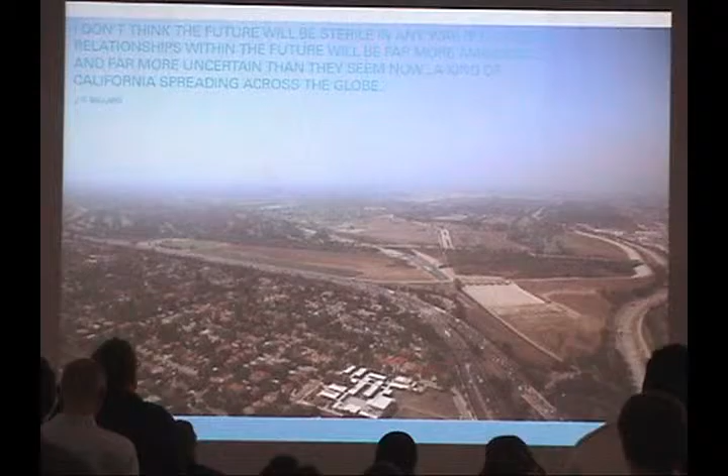This was an image I took last May. I've been up in a helicopter a few times over Los Angeles with a photographer friend of mine, looking at the space in between being on the ground and in between Google Earth. Even this sort of 2,000-foot horizon line series of images has been incredibly interesting for me to look at the relationship between deep space, horizontality, and objectivity.

A kind of graphic project vis-a-vis land use has a lot of influence on the way we think about work. So the first part of the lecture is a bit straightforward.

We'll talk about the Highline project, which is currently our biggest project in construction. To a certain extent, it's a project which probably does summarize a lot of what the lecture might be about. But I also want to go deeper into it in terms of a kind of building process.

New York, we understand, is obviously a kind of city based on the idea that unconsciously Manhattan, among all the boroughs, is essentially the identity device of New York. But identity at one level has shifted over the last 5 or 7 years through Manhattan's growing autonomy as a site for real estate speculation.

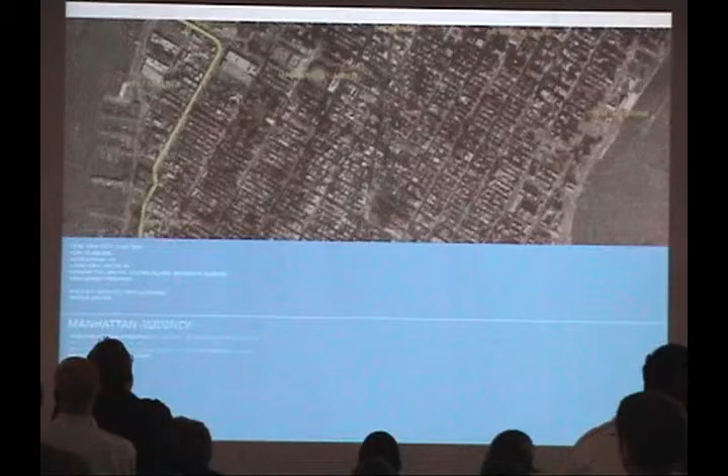Architecture and architects have been given opportunities to contribute to that kind of isolated market. There are 50 or 60 projects by well-known offices who've gotten chances to do their first projects in New York, and in some cases North America, beginning with probably Richard Meier, who practiced in New York for 30-something years and got to do his first building in his own city.

This issue of real estate saving Manhattan challenges the issue of new identities for the city. It's been an interesting thing to figure out how to speculate on all aspects of architecture where you don't have control over a lot of the issues—in this case, condominium housing and condominium planning, which might not seem to be the most provocative kind of material to work with.

So essentially what one is left with, in my estimation, is how to make a private building and convert it into a public project.

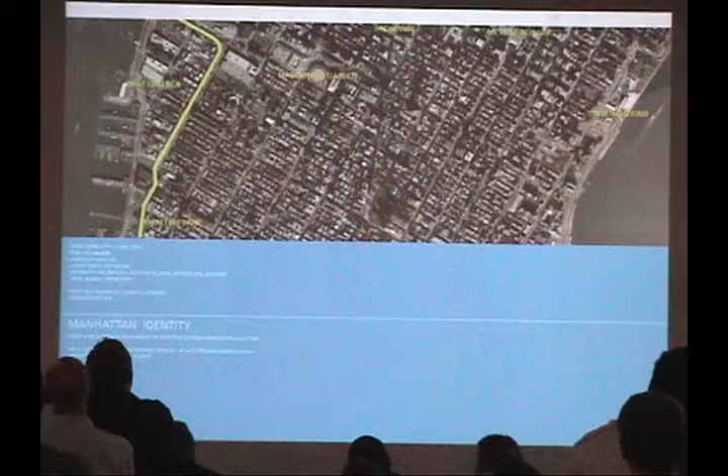The High Line we know pretty well, being developed and constructed now in Chelsea on the west side, and here are your other monuments. 23rd Street is a pretty interesting street, a major thoroughfare east and west, and we're just to the west of 10th Avenue, as the High Line is about 100 yards also to the west. London Terrace is right here—one of the biggest mega buildings in Manhattan, a big giant brick apartment building.

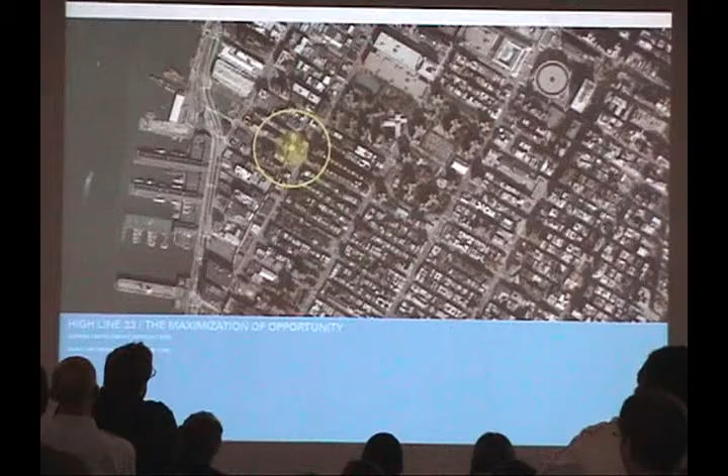Down here is more of the types of influences that I would like to bring to a project. That's the Chelsea Hotel, where Sid Vicious and Bob Dylan and William Burroughs all hung out and plied their trades.

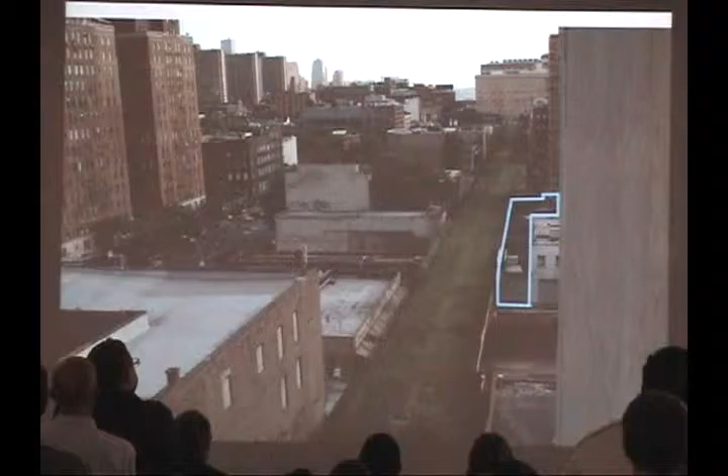So the site that you see here, it's a block-through site. We're looking south down the High Line. These images are from March 2005 when we began the project. It's now 3 years in the making, more the normal kind of time frame to do architecture, more or less a 4 to 5 year project. London Terrace is here, 10th Avenue is here, and I think construction is coming up to 20th Street on the High Line in the next half year.

Looking to the north, it's important to understand this site and this project, and I'll try to fold in the issues in the preamble to the lecture. If, on the one hand, architecture becomes sort of authentic, if it's connected to a site, in that a building can't be exported to any other site because the site drives it to a form of particularity, to a form of autonomy.

My experiences in Japan actually have led me to believe that this is a site which I've seen before, even though it's actually a very singular site along the High Line. Therefore, all projects to me have a threat to move someplace else, and that's maybe the first taboo to offer. Can projects really have so much weight, so much gravity, so much specificity that there would be no possible claiming that they could migrate? So I want to put that in your ear as you see this project being, let's say, literally excavated out of this site.

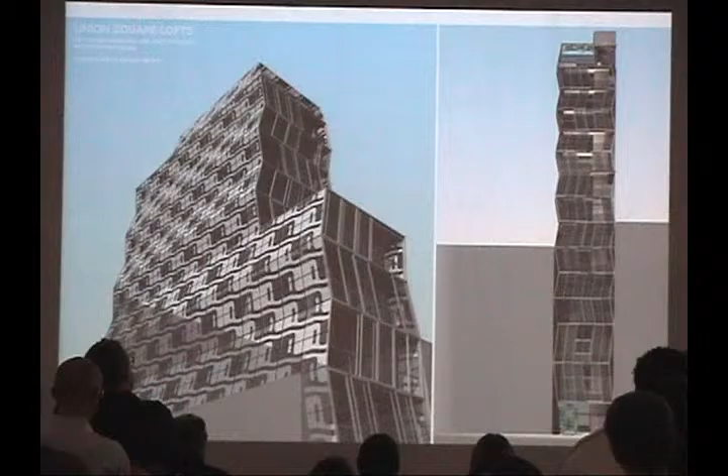In this case, it was our first project in sort of the harder core real estate market, where we essentially know that we have to have a straightforward scissor stair core, and we have a plate of space left to make this kind of loft. Our project was pushed to the perimeter, and it becomes an absolutely unabashed envelope project. It was a bit of a shock to get the commission, and to be thrust into the world of experimentation within 50 centimeters, because organizationally the project was determined.

Now I'll show you 7 images of 7 drawings which describe the 7 exceptions to the zoning that this building, let's say, demanded or asked for.

Because on this site, and I'll put you in the context, there's the High Line. In this case, we're looking to the north. The blue part is the as-of-right volume that could be constructed on the site, a 25-foot wide building. Of course, our client was well aware of that, and he asked us if we could make a building bigger, for 2 reasons. One, he wanted a more profitable project. Number 2, he had a sense, even though he was a rookie in development, that this particular site would demand a building that didn't conform, because the conforming volume somehow to him wouldn't be interesting enough at this 23rd Street juncture.

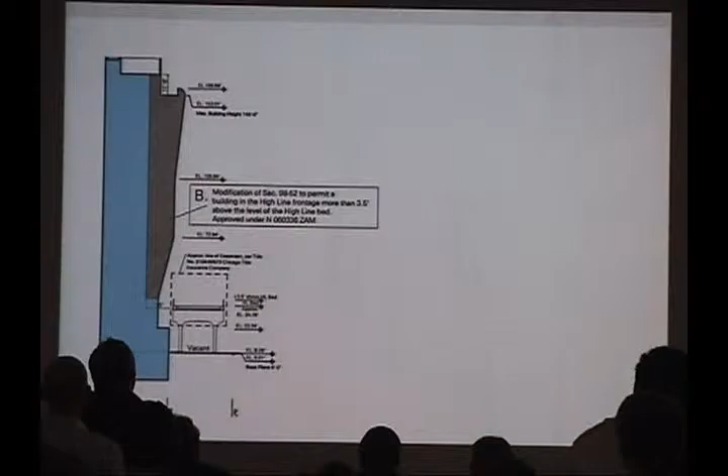So that's the main intrusion into the setbacks. 15 feet from the High Line was the conventional easement, leaving 25 feet of a 40-foot wide site, with 5 feet into public space. I think it's one of the only, if not the only, places in New York where there's actually inhabitable volume in public space that's not like a cornice or a piece of decoration.

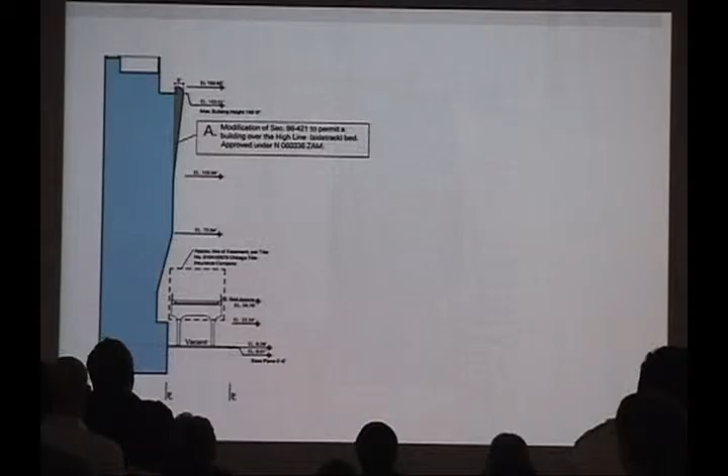And this profile, which is just a profile to help the floor plates continue to get bigger as they go on the top, I'll show you why that was needed. It's also the description of where, in terms of the graphic and the idea of the profile, we were working with the idea that this essentially held the code to whether or not we were going to be able to make this project work for city planning, because in many ways this was our discretion: how wide, how far, how quick can we in fact expand the width of the building and have it still seem as though the project is in a perfect hand-in-glove emergent fit with the site.

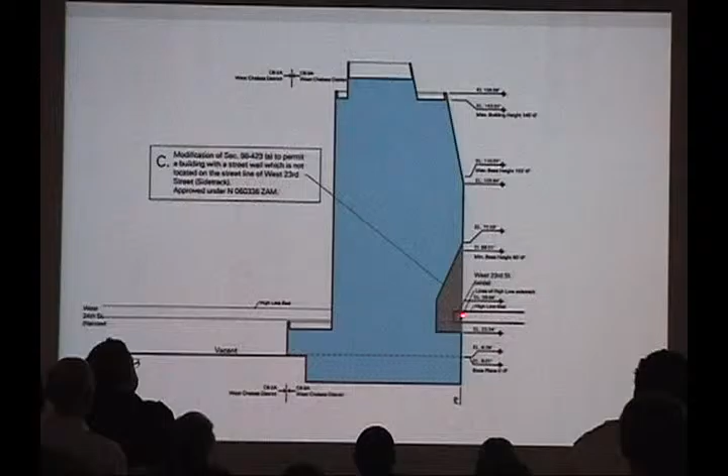The issues that also forced the project away from other developers was the fact that the High Line actually entered the buildable volume of the site by 5 feet. So this kind of Aikido method of simply having the building avoid this intrusion produces this kind of geometry, and it also produces a situation in plan which had to be worked around as a bit of a problem. But this is an interesting moment where zoning forces you to build a complete street wall, but the site condition won't allow you to. So we inherit that as a kind of form finder.

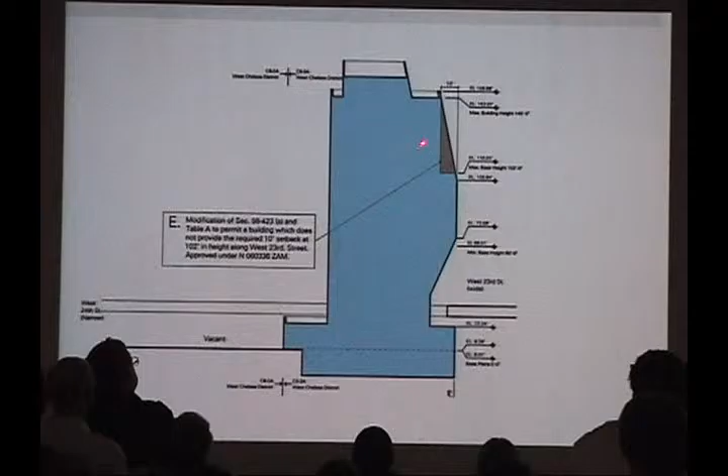In this case, the sky plane, we just asked city planning if we could build out along the plane of the envelope rather than the traditional wedding cake step back. 5 feet was asked for also in the rear because of internal planning, and a 14th floor to make a 2-story penthouse was also asked for.

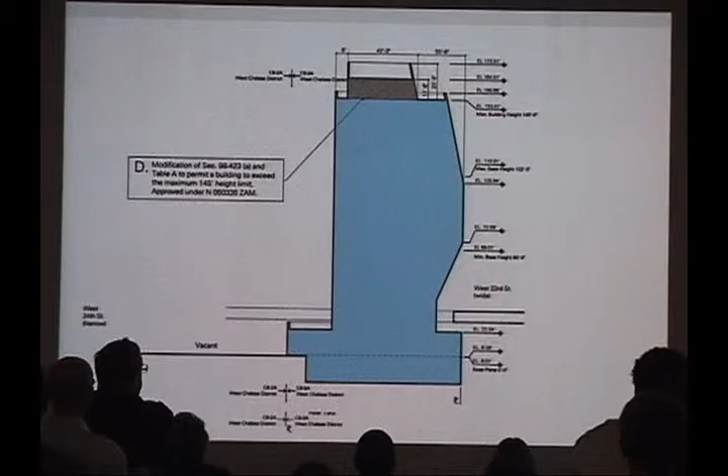So it's much taller, much wider, much deeper than the building zoning would allow. With that, the project emerged as a moment where surely city planning would not want to continue supporting projects that were that aggressive in tweaking the zoning. But because we have a unique site, with 3 facades - south, east and north - we have not only a corner condition in a mid-block, we actually have almost an end block condition, as if the building was stretching between 2 streets, a site giving us 3 facades. So the uniqueness of it as a found condition allowed us to insert a building which wouldn't cast shadows or create negative conditions around the site, the kinds of things that would have shot the project down.

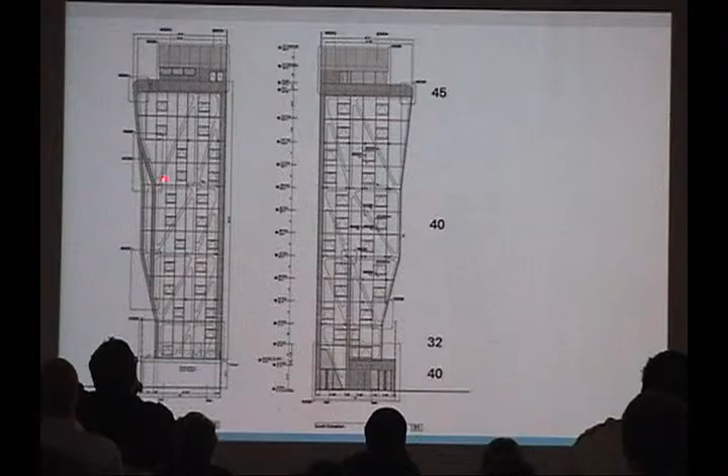So on the front facades, the building is essentially split into two very self-similar profiles. This one on the south facade, you can see the 40-foot wide footprint, 32, and out to 45, and the modulation between that exterior surface in the front and back, allowing north-facing slots of glass. In this sense, the project is both found or excavated on one hand, partly produced from the demand of the client, and at the same time also invented or propagated from our own interests.

In that sense, this project is probably no different than any other project we would work on, except I wouldn't go so far as to say this project would ever happen again anywhere else. I'm not claiming the project is responsive, but the formal language we work with is a responsive formal language. It's actually a highly economical formal language, and it's a way in which issues of opaque versus transparent surfaces - in this case, a transparent surface demanded by the client for south-facing views - makes a lot of sense.

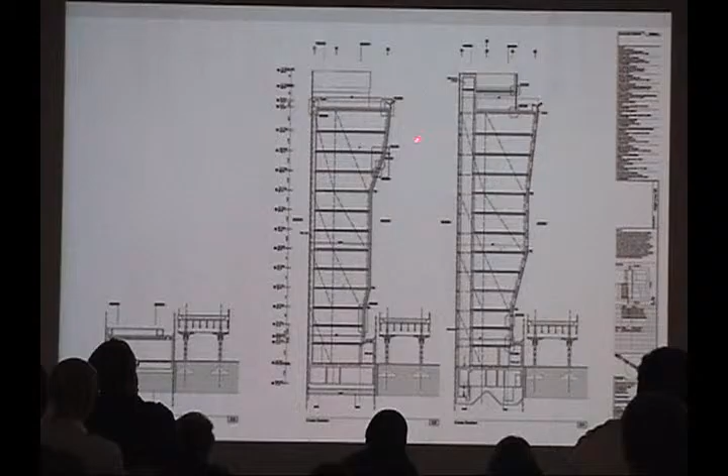But also for the ways in which the project, in terms of a surface relentless in its own ambition to articulate this half of the building, the profiles are completely based on the demand and agenda for the idea that the form of the building is sloping back at the bottom and sloping out at the top, as a way to constantly create the most amount of square footage higher up in the air.

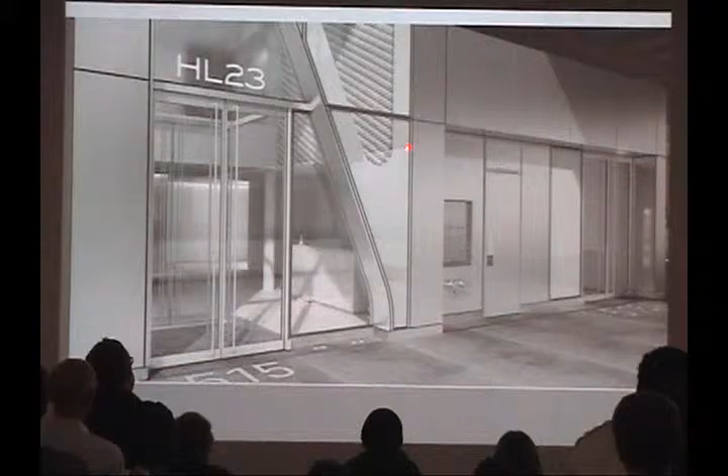Here's a view of the lobby. It's anodized aluminum. This is the gallery next door - a very small Japanese scale lobby, 2 stories back to a single elevator. You can see the laminated glass units coming down, and the relationship of the graphic project and the frit on the exterior that essentially mirrors the structure on the interior.

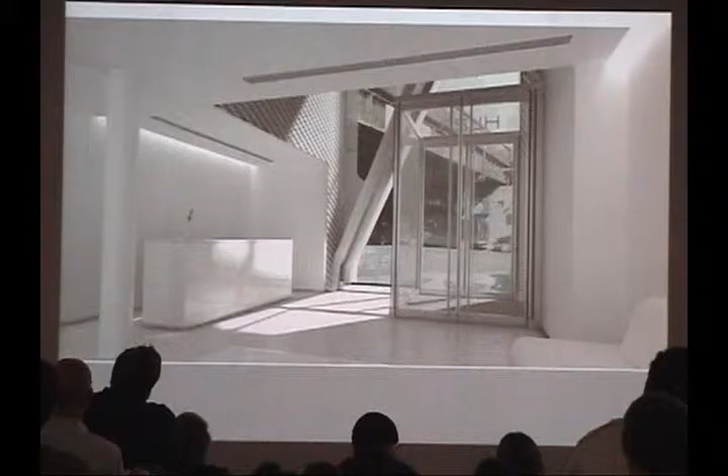Here's where we get into methods that aren't new, but are particular to us, and ring true in this case—becoming a kind of symbolic project: the thin, the 2D, literally meeting, sort of centimeters away, the robust modernist, force-taking expression of robust structure.

When you read the project, we want the frit to be the first thing you read, as a kind of immediate afterburner. So the first thing we're interested in is reading the 2D proposition of the facade. The building is robust and constantly changing, never completely flattened in any one plane, yet I believe in the power of these devices because here they're doing nothing more than reiterating the structure.

The question would be, why bother? Why spend that much time talking about something when the tectonics of the project would be completely readable behind the glass, in terms of an offset series of diagonals and verticals? Let's just say it comes after a lot of thought and analysis about contemporary life, contemporary culture, and the idea of the resonant nature of the 2D.

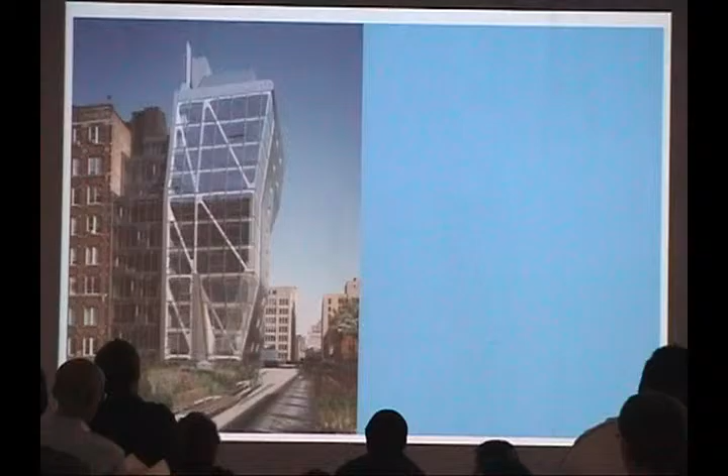It's become something I believe architecture can readily absorb and engage with. It's a little hard to articulate because to a certain extent we're talking about issues of visual perception, for which psychology, history, and one's experiences become part of it.

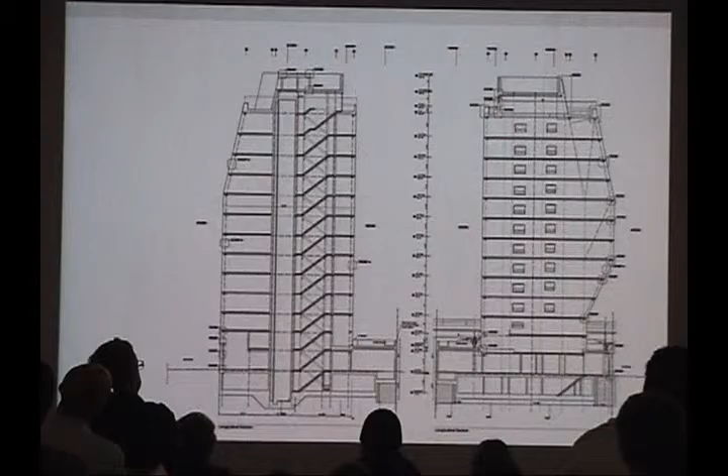As we work back into the building, you can see the machinic nature of one unit per floor. We have a duplex down here, a duplex up here, and you step out of the elevator and door into a unit. The profile of the section is completely determined by the setbacks and the challenges to the zoning.

The plan is very straightforward. Our client asked us to make a rather continuous curtain wall on both the north and south, with an opaque surface on the east. So our client zoned the way the envelope would work from a visual performance level. In that sense, we're working with the logic that the views north and south are held in perpetuity, whereas we know buildings could be built to the east, where proximity becomes a little challenged.

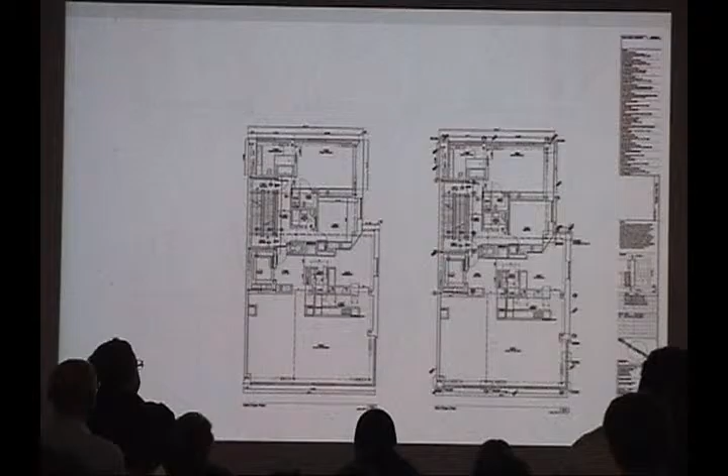The structural framing of the project is as light a building as possible, because we have the eccentricity of the sectional geometry. It's pretty clear the building simply wants to fall over from its base. We don't have a very big backspan or footprint to actually connect the building to, and we have a number of convergent moments at this particular point where there's a lot of eccentric force coming down into the building.

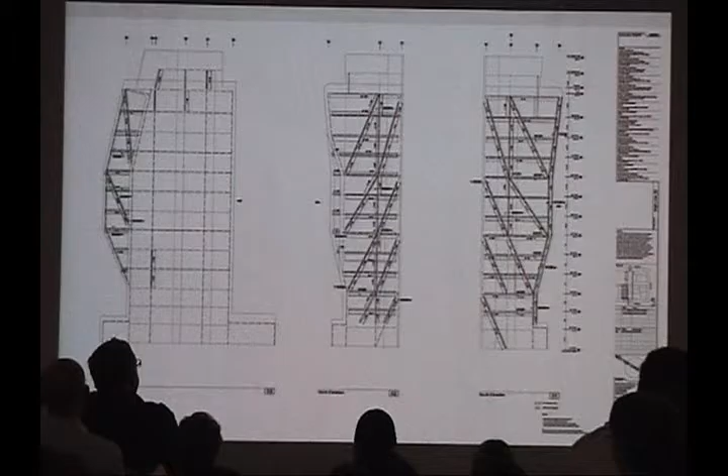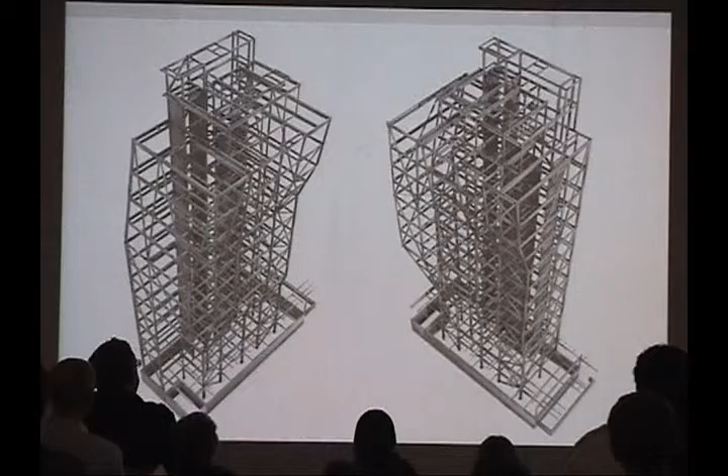The structural frame, the core—we have shear plates going all the way up. And the diagonals, of course, not only deal with lateral forces but also torsional and twisting forces. Because if the building wanted to fall over, it wouldn't just simply fall directly to the east—it would want to rotate as it's moving down.

The steel is being fabricated in Montreal, and it's just one link in a kind of network of global moments of this project's production. This is a view of the frame.

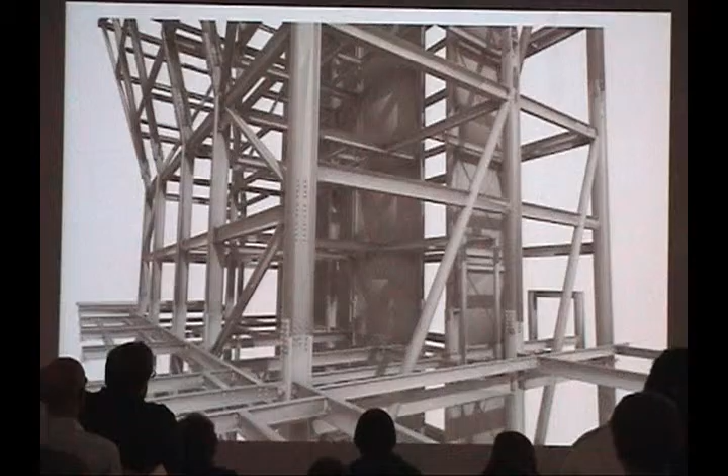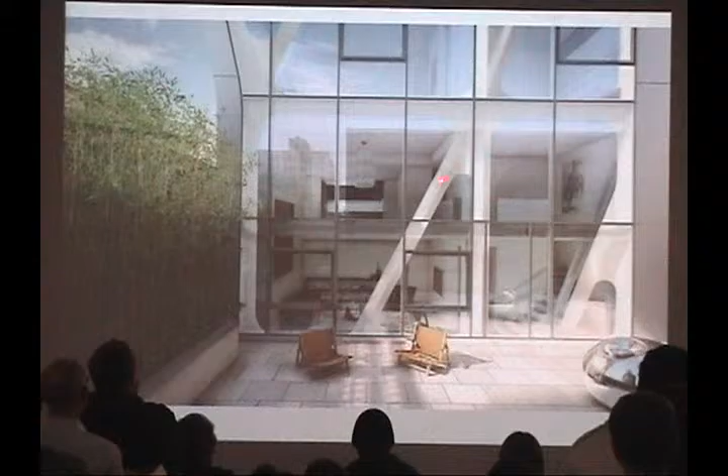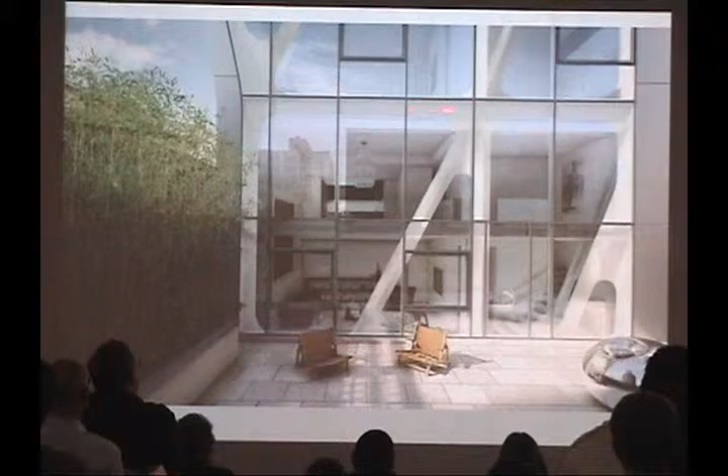So you see the proposition of the graphic, and you see that the glazing is very, very large. The second issue, beyond reading this ceramic frit, is that it also breaks the building down into three big bays, with the glass floor to floor and no spandrel. The second thing we want is for the building to look much taller than it really is.

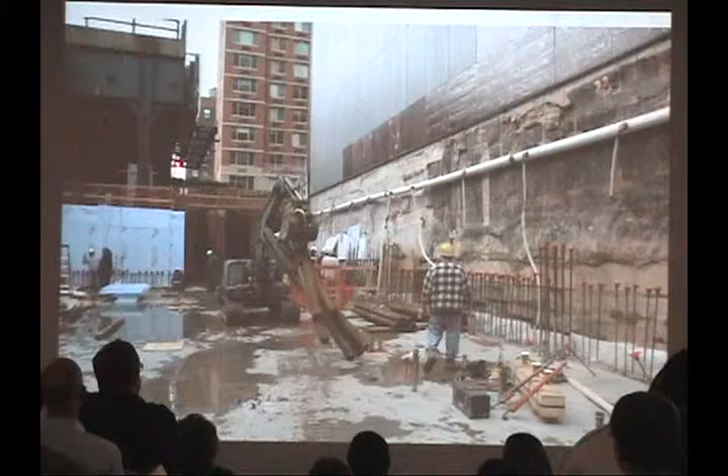If something can emerge in a world where virtually no piece of ground, stone, or site could be left unturned, this is a project that exemplifies that. Here's the spur to the High Line that actually comes into the site, creating this jog in the plan. We have a thin wall here before the building, and the geometry emerges back up top.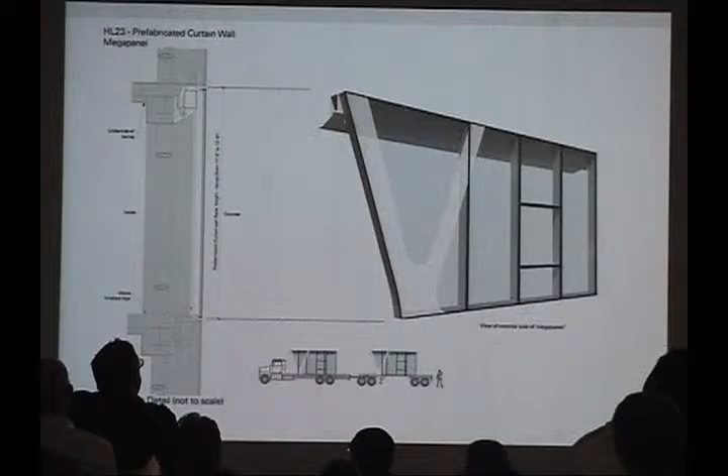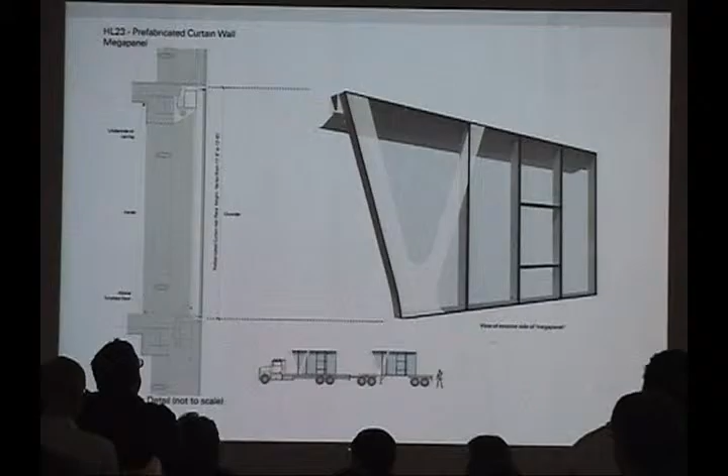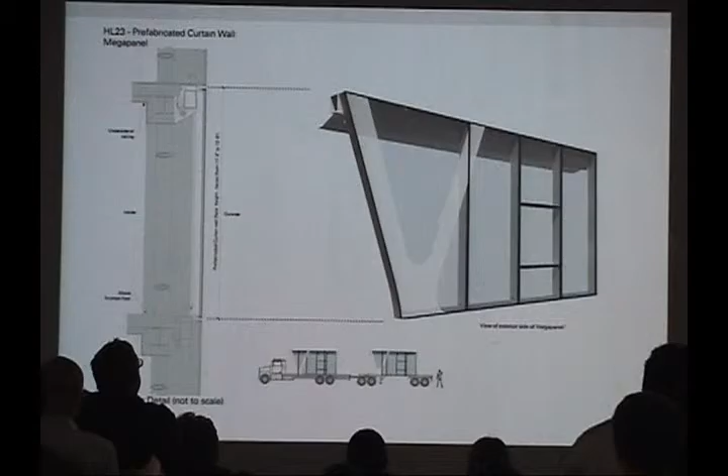What this does really beautifully is limit the movement on the facade between the mega panels to just a number of joints, whereas if you were to put up the glass in a stick-built fashion, and the building were to move in inter-story drift, all the glass would move separately, requiring a bigger joint to take up that movement. So we have very small joints here, somewhat larger joints there, three-quarters of an inch down to one inch, and I can assure you that's actually pretty thin in the world of curtain wall design.

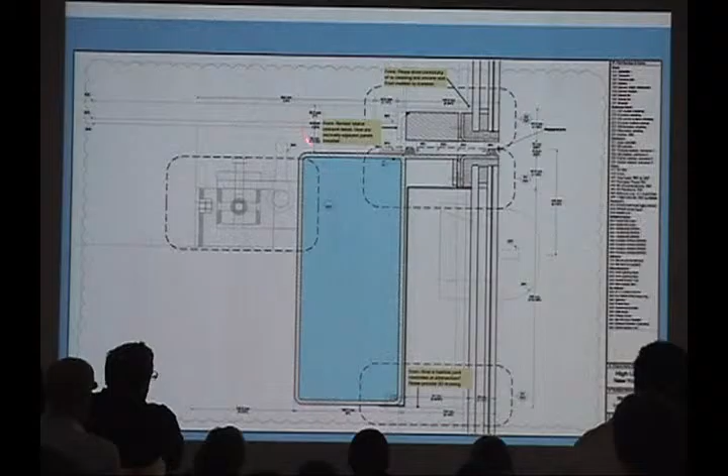This is where we don't have a spandrel panel, where you would typically have one to cover up the floor package and floor thickness. These are made up of steel plates customized to the slopes and underslung conditions, connected back to the structural frame.

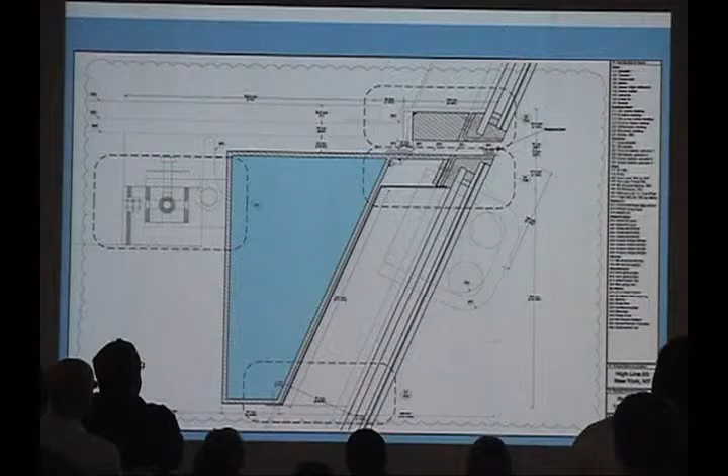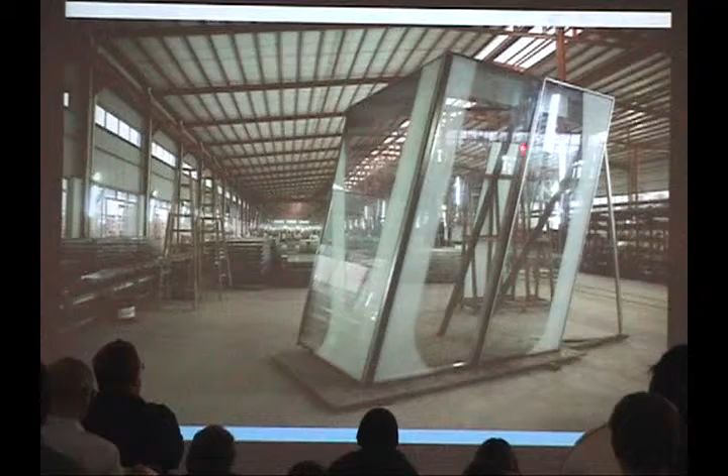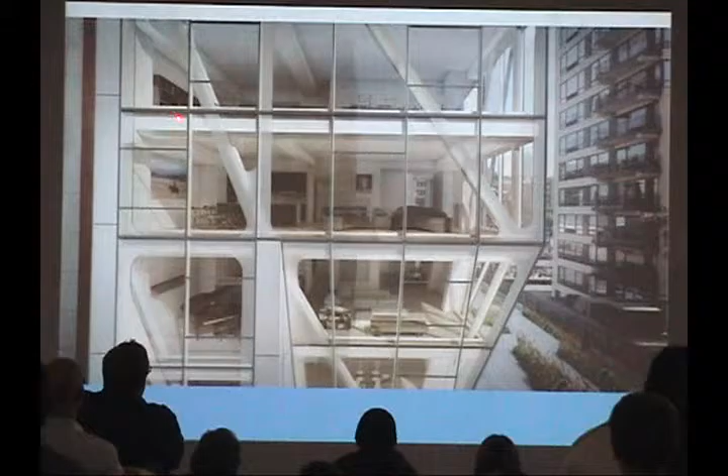But this is the idea of the layering of two-dimensional information, because we know that the grid of the glass represents a pattern. The pattern is two-dimensional, and it works very closely with the frit—we want the frit to be the front surface onto this whole thing.

Here's the 13th floor, and you can see the relationship of the structure to this kind of doppelganger, and these very large windows—six feet by five feet, motorized windows.

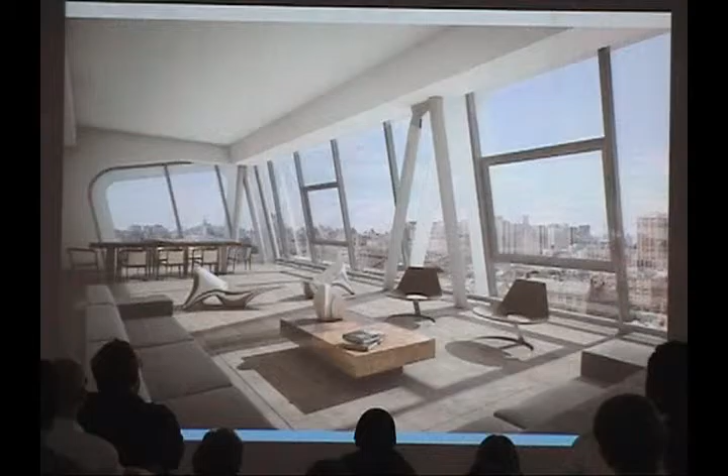The main thing about the project is with one unit per floor, you're constantly maneuvering through and around the perimeter of the building. So even in the fancy bathroom, you still have a deep connection, not only to the views outside, which are fantastic, but to the tectonic operations of the building, the robust nature of the structure, and the scale of operability of the curtain wall.

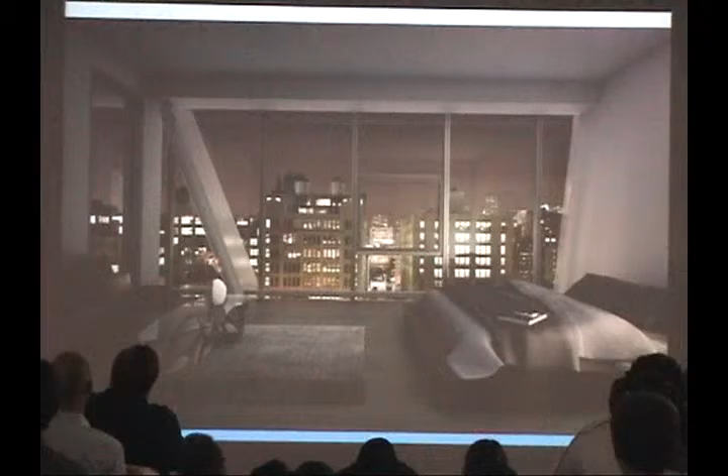The east facade mega panels are similar, but made up of a different set of components. These stainless steel panels are coming from Buenos Aires, and they're being mounted onto a straightforward stud backup system that will be built on Long Island, then trucked from Long Island and lifted up in mega panels onto the east facade, with punched windows installed from Germany.

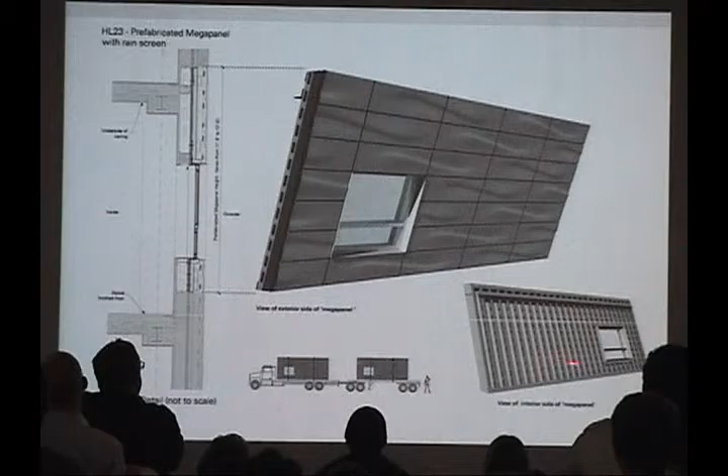The stainless steel panels are dimensioned to do one thing: ensure no panel curves in section across its broader surface. So this 18-inch dimension allows us to take up all the radii within the east facade. Meanwhile, most of our work, headaches, and nightmares have been about—